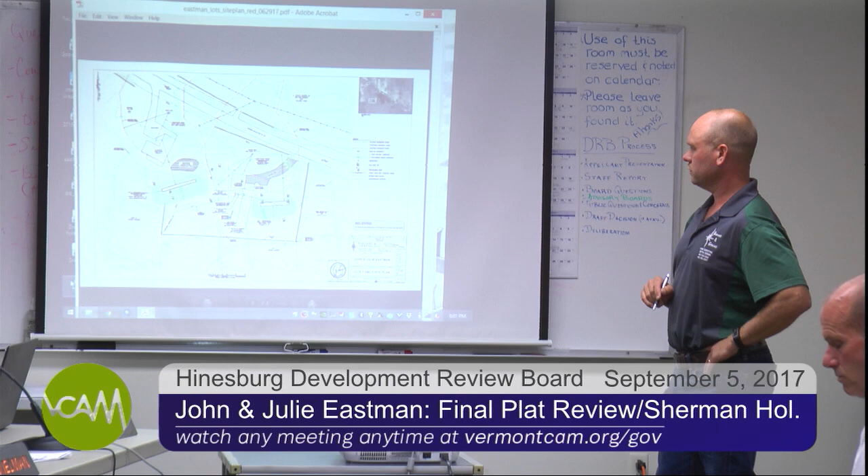You do, okay. Well, we can start with the site plan since it's up. And the other one we wanted was the plat. Let's see, the plat. The Eastman Subdivision, red. That one came through, yeah, that's it. All right, whichever one you want to start with. That's fine, the plat.

So basically, John and Julie came in maybe a year or so ago, first started with a sketch plan. The inception of the project was when subdivision and zoning regs were changing in that area, so they could have the potential to subdivide the property, creating a second developable lot. The existing acreage is 10.67 acres in size. You can see the outer perimeter of the property here. Once subdivided, lot 2 is 5.84 acres, and lot 1 with the existing 5-bedroom home is 4.84 acres.

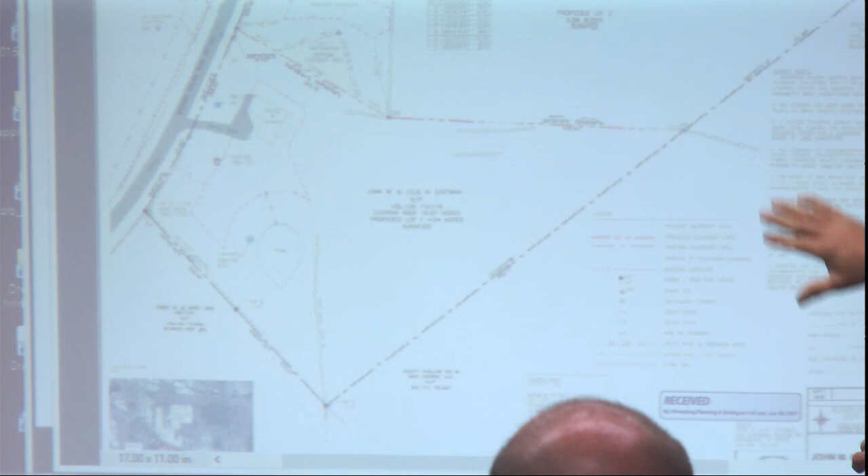We tried to follow some of the existing stone wall features where the line was placed, that's why there's a little bit different acreage. There's an acre difference between the two parcels. In terms of the building envelope, you can see where it's situated above the stone wall. There are some wetlands off to the southeast of the property, which we were able to stay away from considerably. We're up closer to the road, in the upland part of the property.

Keeping everything closer to the road minimizes impervious area and area of disturbance, all of which we were able to keep less than a quarter acre to meet the stormwater requirements. There's an easement associated with the lot number 1 wastewater system, which is a replacement area that straddles the line where we had to place the subdivision line. There really wasn't a lot of other room for it, given the well shields, and to try to keep stuff on good soils outside of the wetlands. We're confident we're up above where there would be any delineated wetlands.

Road cut access — I believe you turned in the application several weeks ago and that was received. There have been several truckloads of fill brought in from various ditching around Sherman Hollow Road. The building envelope is staked, although I know the vegetation is really pretty tall out there, so maybe you didn't see it.

I saw most of it. Did you? Okay, spent about 45 minutes out there looking for it, trying to find stuff. Sorry. They're there, I'll attest to that.

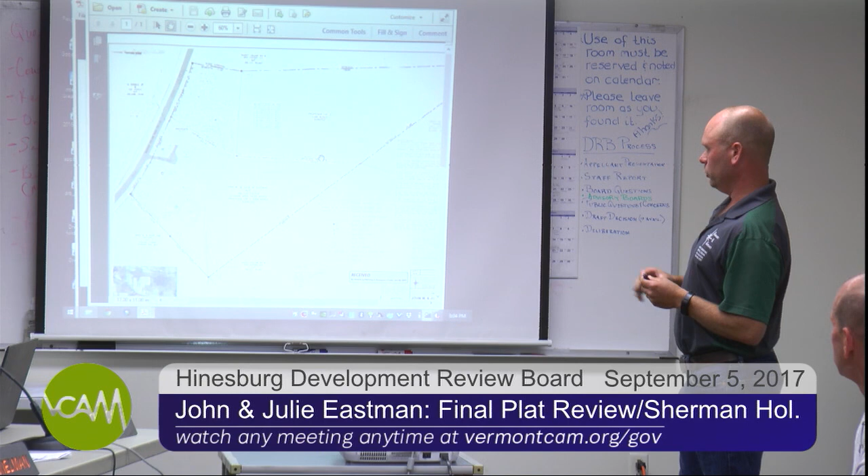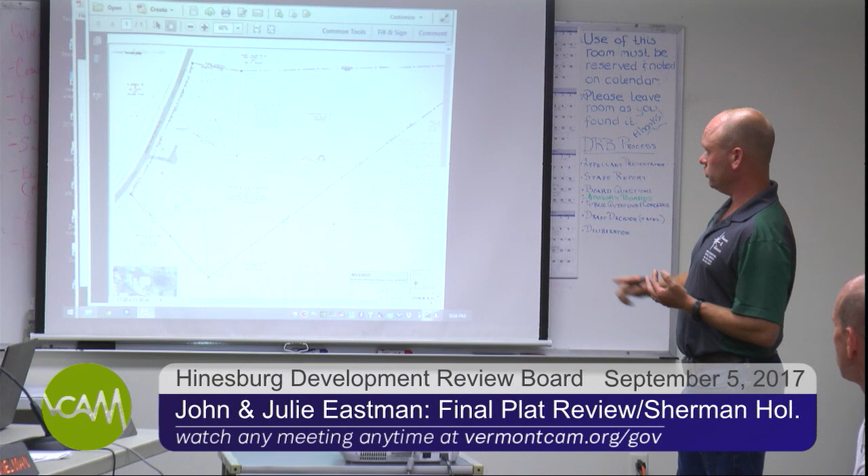Our guys went out with the GPS and staked everything, so the new parcel has been issued a wastewater permit. The project has a state water and wastewater permit that came through a couple of weeks ago, and that'll be ready to be recorded after the meeting — we're still within the 30 days. It's a 4-bedroom, single-family home for the new parcel, lot number 2, served by its own well and a proposed mound system below the house, although it will be pressurized. We also have a backup location or replacement area for the lot 1 structure. So the permit's been issued, everything's in compliance, meets all the setbacks, all in regards to property lines, and isolation distances relative to the wells and the wastewater system.

Really a relatively straightforward subdivision, pretty simple. If you have any questions.

If John has some flagging, we can tie a piece of flagging above where the stakes are, if you want to go out and take a look at it.

Sure, it's a little bit of a funky building envelope where the mound system is sort of below that. We wanted to give a little bit of option. We do have all the ties necessary to locate those building envelope corners in the future, and once everything is approved, we can go out and set the pins and put together the final Mylar.

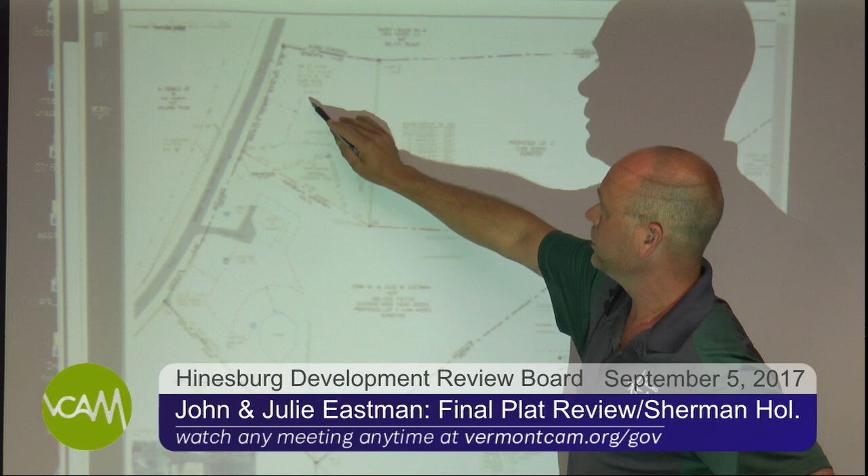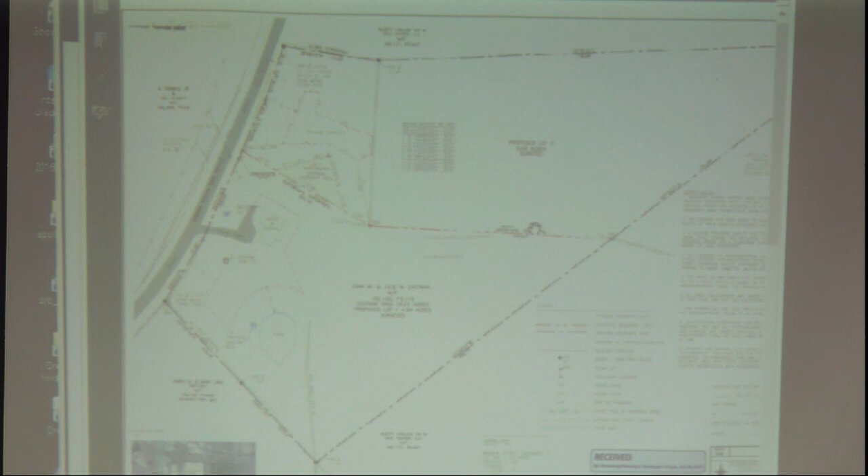Why is the building envelope so irregular? The mound system is here, and we wanted to give a little extra area in case someone wanted to have a little outbuilding above where the system is. It's pretty restrictive right now, but it leaves the bulk of the property untouched.

Board members have any questions? Maybe about the building envelope going right up against the wall. It's not going to impact it. The stone walls are nice because they give us some sort of idea of where we are on the property. The stone wall's not going to be affected, but it does demarcate where things can go, so it gives a good stopping point.

In terms of, I know there's no stormwater permit required, but regarding the gradient coming down the driveway, that's in a ditch and culvert. Most likely the driveway will actually be disconnected, not ditching everything, but graded so that stormwater sheds off from the driveway onto the property itself, and eventually all flows southeast.

I don't see anybody here from the public.

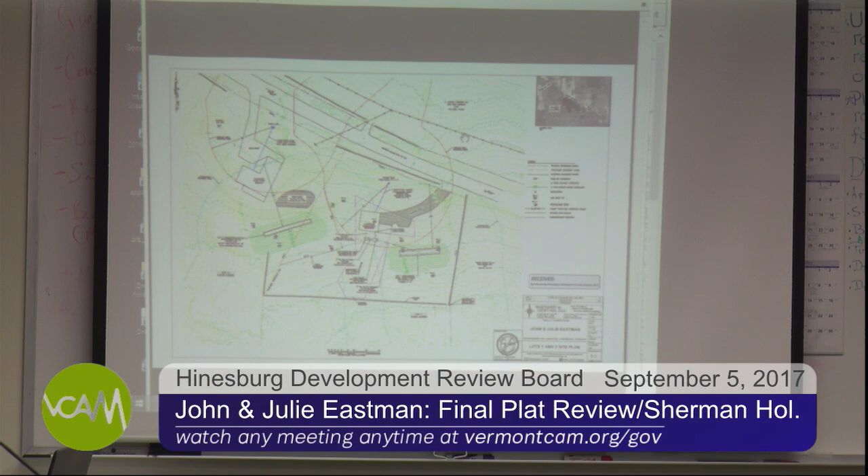There's sort of a radius to the driveway. There's already an existing access that's been started, and the access permit's been issued, right? It has, yeah.

I'll make a motion to approve the draft as written. Do we have a second? I'll second that. All those in favor? Aye, aye, aye. Thank you, thank you, thank you.

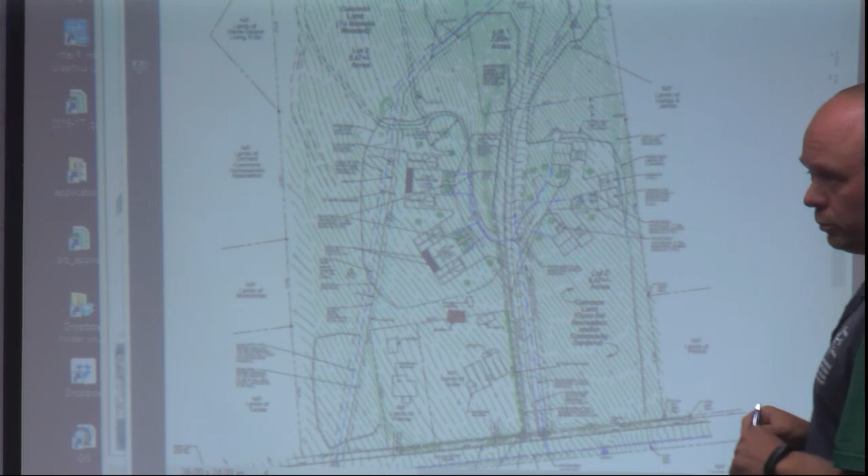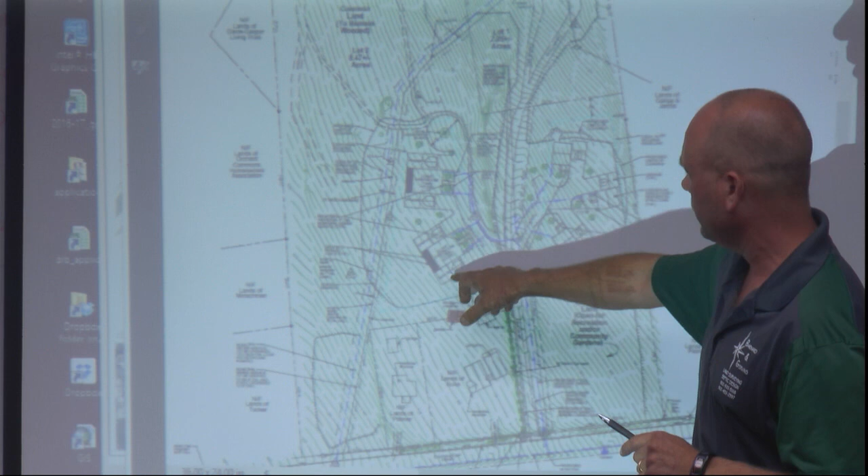We've stepped back, separated things, and made 2 units not connected, made the parking area considerably smaller, with a turnaround on the far side of the parking area with a landscaped island in the middle. The driveways have access for 2 cars for each unit, with a garage, so there's actually more parking. We reduced the number of parking spaces, but actually increased the parking, which I think was pretty much the general goal.

Same thing with the other 3 units on the easterly side of the property - we separated those, fanned them out. The building envelopes have not changed from what they were previously. So we did want to separate those items a little bit.

Originally, we had proposed serving by 2 different water and sewer connections. We have eliminated that, we have changed that. We've gone to 1 main sewer connection up here to a manhole that grabs these 2 units, or grabs the 4 units on the westerly side, and then grabs the 3 units on the easterly side. So we were able to reduce some of the infrastructure that's going to be part of the project.

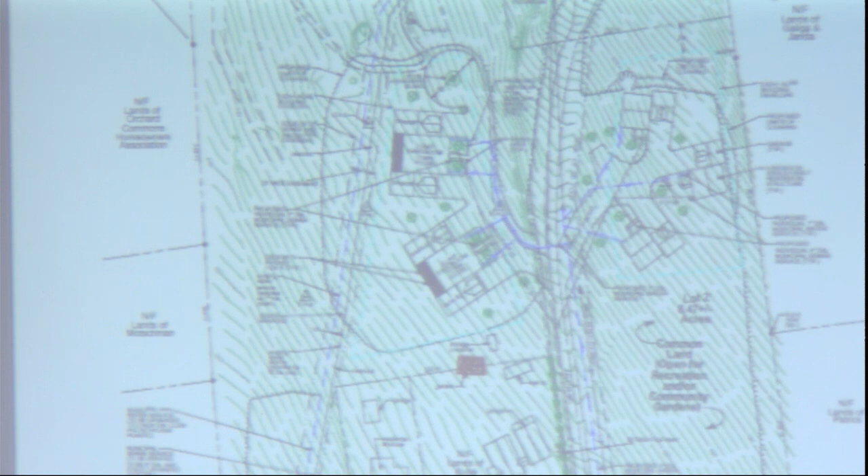It'll run up the road, within the right-of-way, so in the future there won't need to be any excavation or work outside in the field. Likewise with the existing structures, the existing water and sewer services that are there can be left alone. We don't have to try to shut down a residence up at the end of the driveway, install everything, and connect it up - we eliminate all those pains.

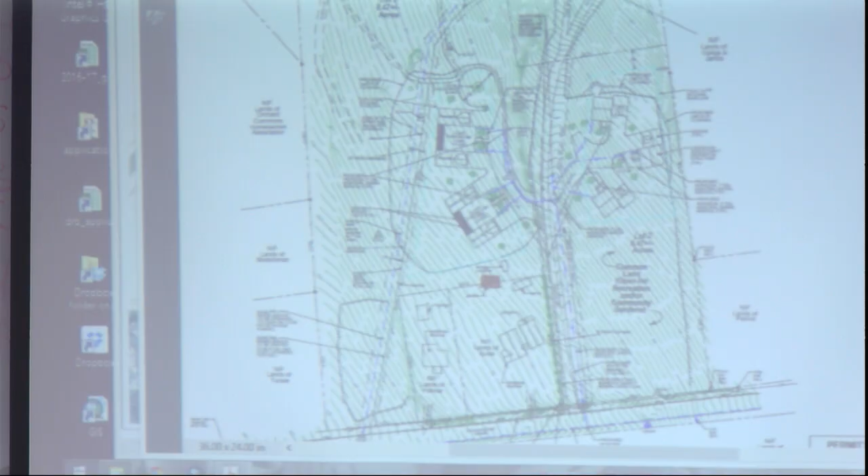Basically the layout - we're at a point now where we've started some of the stormwater work. Some of the grading is going to be tricky to get up into, primarily up into this part here, into the 3 units that are separated on the east side. So we've put everything on hold until we know what is happening with the water.

In terms of the grading, there will be some retaining walls. It's a little bit steep to get in there, so it's tricky. You see all the contours, the change in elevation we're dealing with, so it's a little bit tight.

We don't anticipate having to revise this building envelope. We're going to try not to. It may need to expand a little bit so we can slide the driveway down and make more of a turn to get up to those upper 3 units.

Preliminary sizing with the stormwater - we talked about it before. We're looking at some sort of retention here, and then the widening or upgrading of the road into where they break off to the units. I thought this was a good point to put it before the board, get comments and feedback with general layout before we continue on with the stormwater, because once the grading is set and done, it's kind of hard to go back if buildings start shifting around.

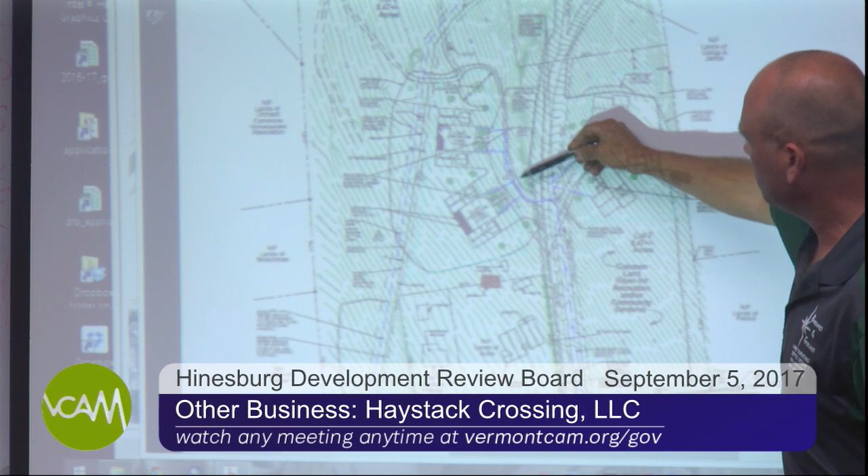The single-family detached housing on the east, do you envision those being almost sunk into the elevation at all, or are they sitting on top of that elevation? They're gonna have to be stepped. Once you start to cut in with a driveway, you gotta start lowering the garages to get down and into here. It's a little bit tricky. There's likely gonna be a retaining wall on this side, maybe up with the same sort of back, just to minimize how far we have to cut back. It's a little bit of playing with the grading, with the cuts and fills, a few retaining walls, but most of those houses are gonna be stepped with the garage to work out.

Could you put up the original one? I don't have one. Actually, the green - put it in here. I have it in the paper. It appears to be much improved. I agree, but I just wondered, I couldn't remember exactly what the first one looked like. Yep, it's not the right one, sorry about that.

While we're pulling that up, I thought I would remark again - I think the aspects of bringing the two together, clearly one lot, makes a lot of the easement discussion about access to the common area easier. This is a minor comment, but about the perception of use of that common land, and whether there could be an informal connection between those single-family households and that wooded area, rather than having them walk along that driveway. Well, you can certainly very easily put a path - that's just what I was thinking, just a physical connection that would create that linkage. I really don't see any reason why there shouldn't be.

I've got a few things. One, this area right over here, where you're kind of cutting in a little bit to the woods - I know Miss Janda had a concern as far as maintaining those woods. Would it be possible to shift this a tiny bit over so you're not cutting into those?

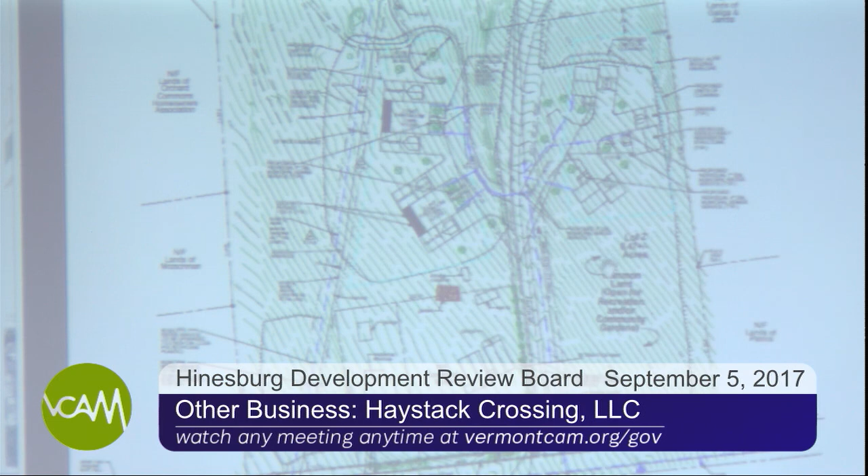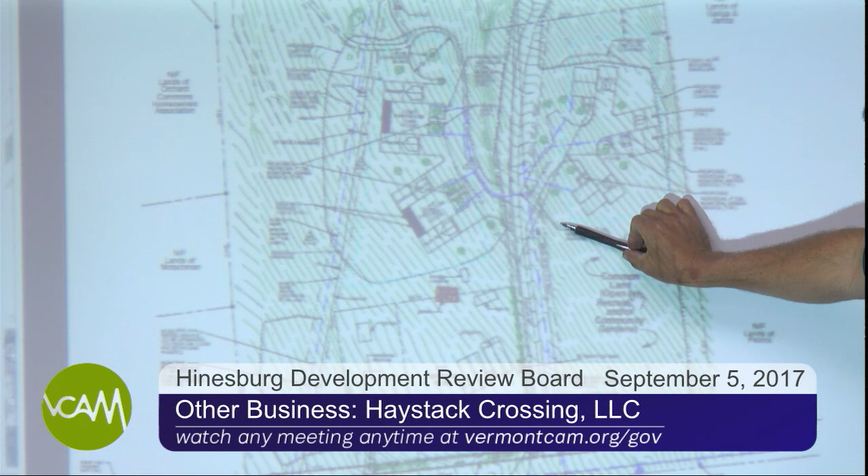The other thought is, did you want to give yourself an option of, say, building a community structure over here to utilize the fields in some way by expanding the building envelope? Well, ultimately we may end up having to expand the building envelope a little bit just to pull this structure down, so it's not such a tight radius to get up with the grade. So if we do have the possibility of bringing that a little further to the south, even if we did put something on it where maybe there was a structure right in the very corner here that could be constructed, I think my client would be open to that.

Just something as far as bringing the community more together. We're not trying to move the building envelope at this point, but unless we have a driveway that's really steep, it may be necessary to pull the house some. You also have an extension of the building envelope way out into here - is there any plans for utilizing this space? Nope, at this point.

What's the purpose, maybe it's required and I'm just not aware, of the cul-de-sac? I guess just so that if someone comes in, makes a mistake, wants to get out of there, it's easily done - if the parking lots are full, they have a place instead of trying to back up and around.

We have tried to tuck it out of the way and sort of hide it behind, as much as possible. That was part of the way, if you recall before the actual parking area extended way up into the hillside. On the right side, how do you get out of there?

Do you just have to back down if the driveways are full, or is that one supposed to be a hammerhead, not a parking space? At the end, the cul-de-sac? No, on the other side. Oh, that's a turnaround, yes. That's not meant to be a parking space, that's meant to be a turnaround.

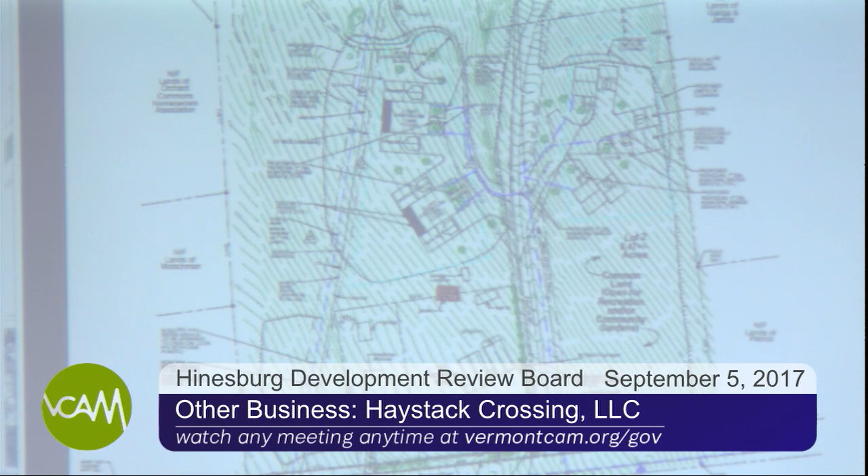I just wonder if Mitch was asking if he was interested in shifting the building envelopes, whatever direction that is? I'm just thinking, south, so that you wouldn't have to come in and ask for an adjustment? Or would you really like to leave it up there where it doesn't look like you need it? Correct.

I'm sure they'll work out the details. There's many details left to be worked out, right? Yeah, there is, I mean...

Ultimately, this neighbor's not going to complain since they still own it, but we may need to get a little more length to the driveway so that we keep things under 12%. That's kind of what we're shooting for here, and we're at 8, 9, 10 with the first few stabs at it, so we're close.

So the question for us is if we see any fatal flaws. I'm looking for general comments on the layout, before, and I think with that, you're not really making any decisions, there's nothing binding, just some general thoughts.

Our next step is to come through for preliminary, and at that point we're going to have the stormwater plan tied with all the grading. The water and sewer connections will be designed, and at least a permit applied for. So at this point, if there's a slight tweak of a structure or a little adjustment of a road, fine, but if there's a major change, like moving everything further apart or closer together, we're trying to give the board an opportunity to comment now.